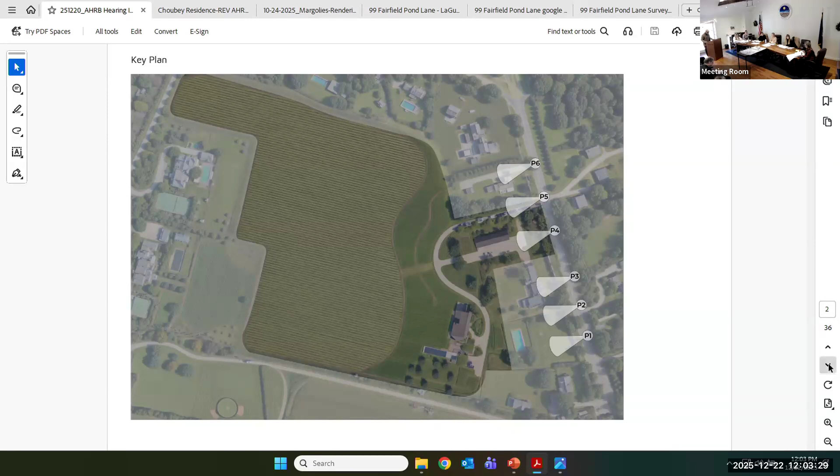Next slide, please. But before getting into the house we will be discussing today, I'd like to explain the broader context of what my clients, Michael and Heather Nardi, are trying to do here. As part of their larger vision, they have acquired 650 feet of frontage on Sagg Main, including the historic Sea Breeze Inn and the Roger Polimas house, located at 500 and 468 Sagg Main.

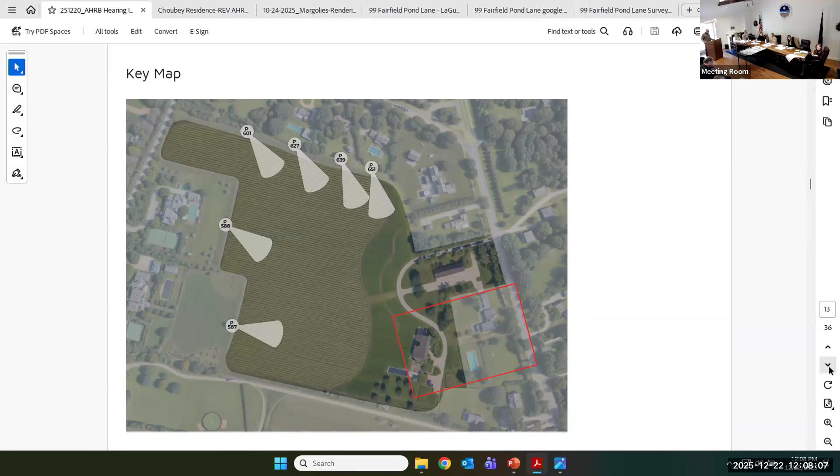Again, the same red rectangle situating Sagg Main at the base. The house you see in the foreground is the Sea Breeze Inn, and the house we're designing for Michael and Heather is at the back. Now we can focus on the house.

Over the intervening sessions between May and now, while accepting this premise, you, the board, have pushed us to pare down elements that do not contribute to this historic agrarian character. Looking back at our original proposal, your suggestions have certainly worked towards this end. We will be seeing views of the proposed house next.

If you go back to the previous slide, please. In our last session on November 24th, you challenged us to pare down the street-facing side further. The flat roof sections in front of the house were removed. While these flat roofs were an integral part of the original design, the shed roofs that replaced them, per Mr. Woods' suggestion, are a more faithful expression of this agrarian vernacular we are after.

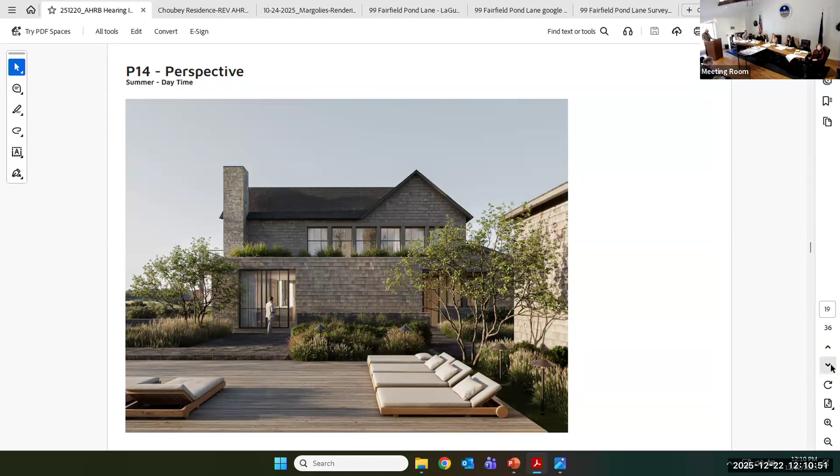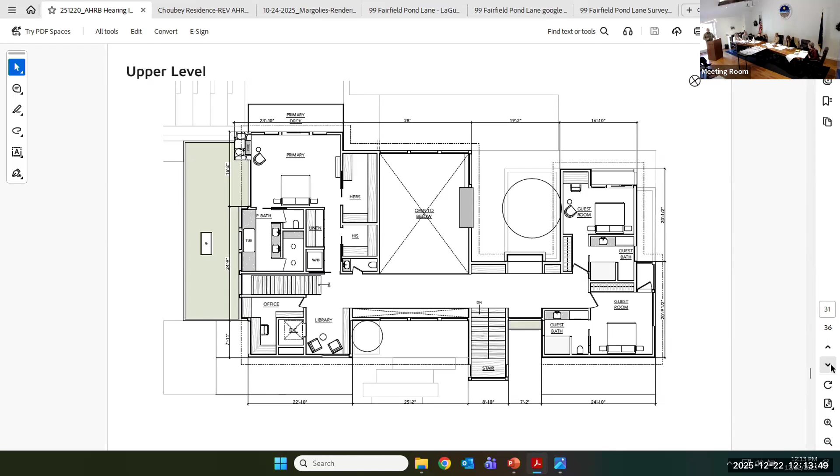In conclusion, we aim to contribute to Sagaponack's historical legacy with a home that belongs here, not by replication, but by resonance. This approach also aligns with who our clients are, folks who grew up here and want to savor its history while celebrating its agrarian roots. Thank you for your time and your patience.

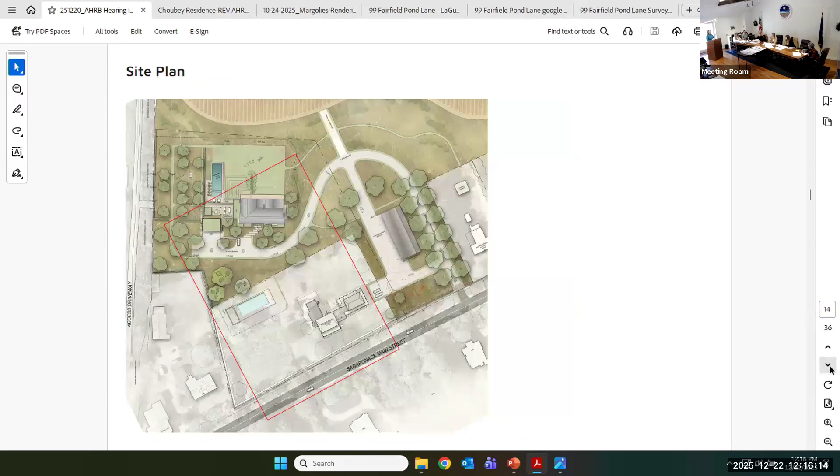Lisa Duryea Fair, would you like to come and speak? Hi, if you don't mind, before I get started, Abby, Pat, can you bring up the slide? It was 13 something or other. It showed the night view of one of the sides of the house. It went by fast, so I'm sorry I didn't write it down. That's it, that section, okay.

Hi everyone, thank you so much. I'm Lisa Duryea Fair, and I really appreciate speaking. I'm going to give you a brief amount of history of my life. I live at 167 Gibson Lane, a piece of property that my family has had someone in at since 1880. My experience with SAG board is 17 years working as village trustee on the architecture board, deputy mayor, as well as monitoring the architecture board and the zoning board during that time. Only our esteemed mayor over there could top me in years of service to our board. So anyway, that's where I come from.

On 11/24/25, the architecture board heard from the owner, Mr. Nardi, that the plan was to develop the property for the greater good of the community. Well, I feel as a community member I could point out some things that would help all of us from my experience, and hopefully bring this project to a better place.

My concern is not only the design, but the light and the glazing. My experience has shown me that there is no way a computer generated slide, like the one on the left, is going to accurately show you what the light looks like at night. I'll give you an example: if you stand on Gibson Lane or down on the beach, when people have their full lights up in modern houses with larger windows, you'll see that they don't look like what the computer generated model presented to our good board.

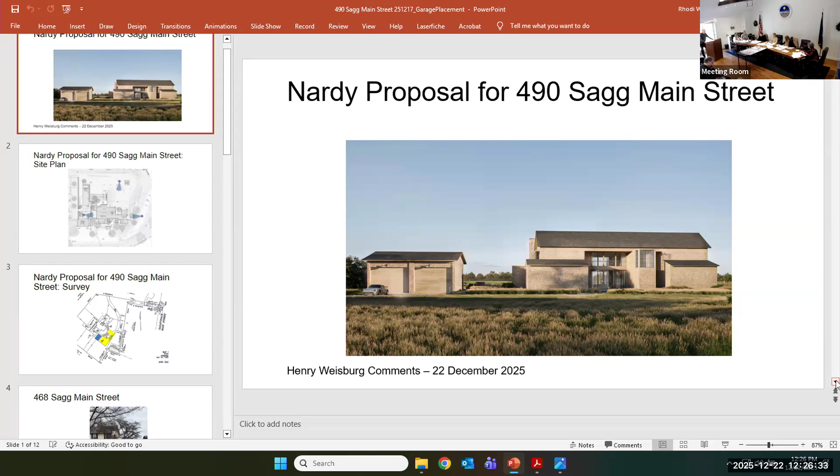If you go to the next slide, who's controlling the slides? Can you get rid of those little panels on the side? If you go to slide view, you can do it. See slide view on the top? Okay, then go to the left, down to the left, it goes slideshow. Maybe people will be able to see it. If you go to slideshow, click on that.

If you go to the next slide, this is somehow or other, for some reason I received this in the mail from Mr. Nardi's lawyer, and this is the actual survey of the property. What I've done, those colors are mine.

The blue is the garage, and the yellow is the parking lot. It's hard to measure precisely, but it looks like it will accommodate something like 10 to 12 cars in that open area. It is immense, virtually as wide as the entire structure. So what the street will see is the garage, and at street level you can't necessarily see the gravel, but you'll see cars parked there. So again we have an automotive presentation, and I'll get back to that because we've recently been through that exact problem.

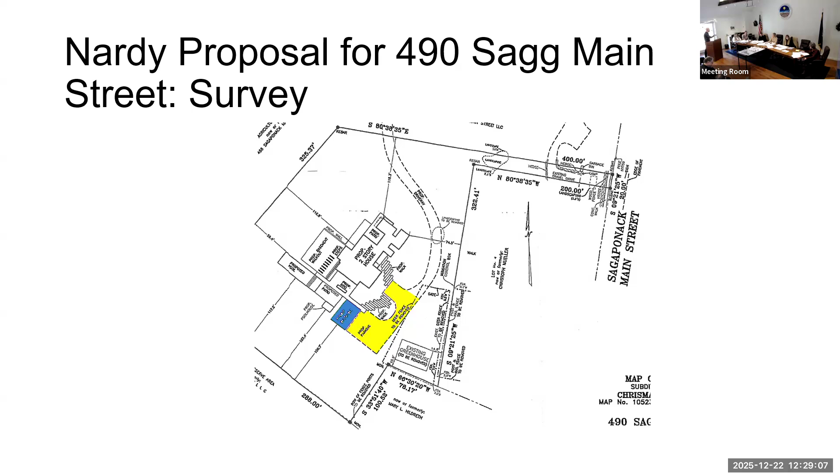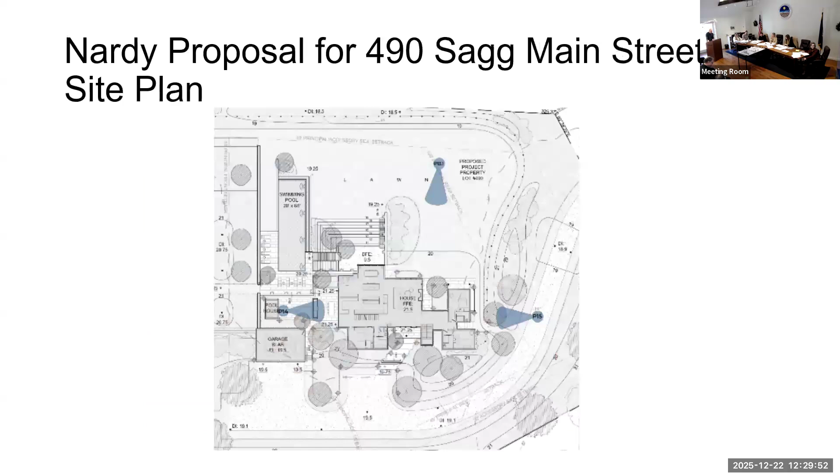And I don't think that's an appropriate structure. So now we've looked at the house. Now we should look at the surrounding community. What else is there? I've taken pictures of every house with a garage between Sagaponack Road and, is it Hedges? No, if you go back, please go back one.

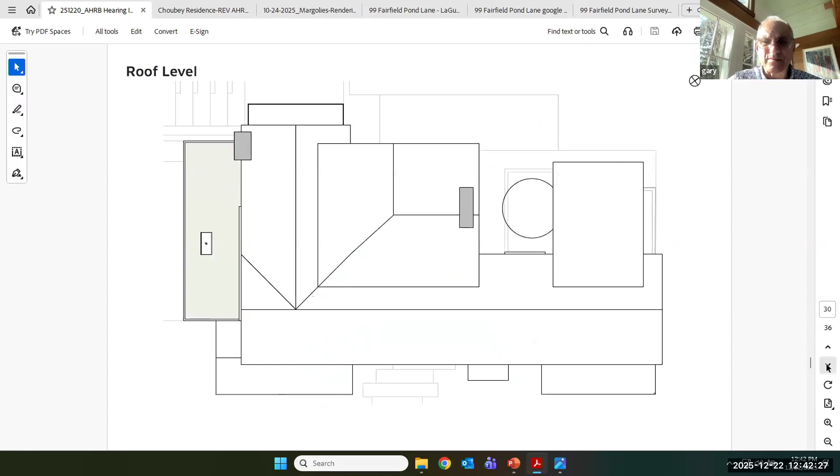This one, Gary? Yeah, it doesn't—this one unfortunately doesn't show all the neighboring properties. But I did look at this on Google Earth, and my concern isn't really so much with the house. I don't know how much light is going to come out of that at night. I'm assuming it's not—I wasn't at prior meetings, so I don't want to pass judgment. I'm assuming the light has been cut back significantly. My concern is really—

Using the ag reserve to bring headlights in, to bring light like that. I've lived in this house for over about 30 years, and it's always been peaceful, no light on the field—except I've had some problems with a big house directly opposite, to the west, where they shine their spotlight right into our bedroom windows. I've had to go over there sometimes because we just can't sleep. So I have the same concern here.

I don't know how many cars are going to be coming in and out at night, especially leaving the property. Does that driveway have to go like that, because it's using the farm? When I bought my property, I assumed it was an ag reserve and would not be used other than for farm vehicles. I'm concerned about the cars coming in and going out, how many there will be—which we'd have no control over—and being woken up at night with constant headlights. I'm not the only house that would be affected, because of the way this sweeps into the field. I see that the way the subdivision was created with the flag lot, provision was made for the driveway.

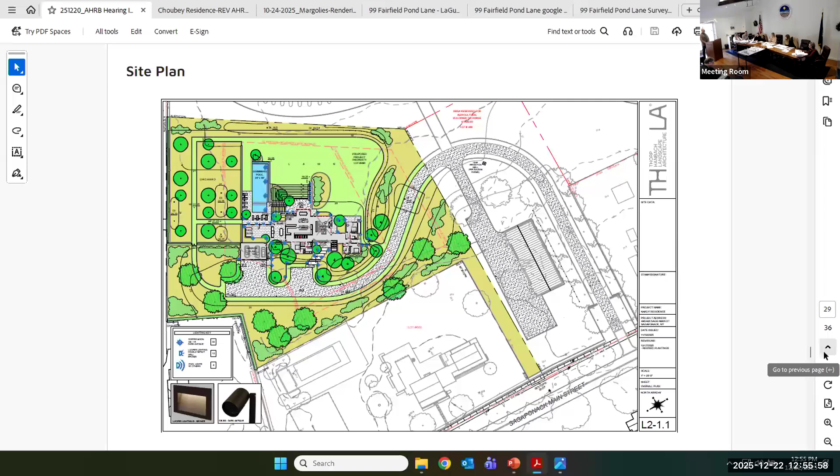Does that make sense? It does - I understand why you want it. What I'm saying is it's floor to ceiling windows, and it's wrapping around, so that whole section of the house is just glass. And I'm not talking about the pop out on the front of the house. The stair, you mean?

It doesn't look right to me. It looks odd, especially in a historic district. Behind this beautiful historic home, it's not meshing.

I'm also curious, what is the material of the chimney? That's stone. What type of stone? I believe it was fieldstone, Connecticut fieldstone, the same stone we had in the lower level of the building that we removed completely. So that stone remains, grayish Connecticut stone. I'd like to see samples of that when you come.

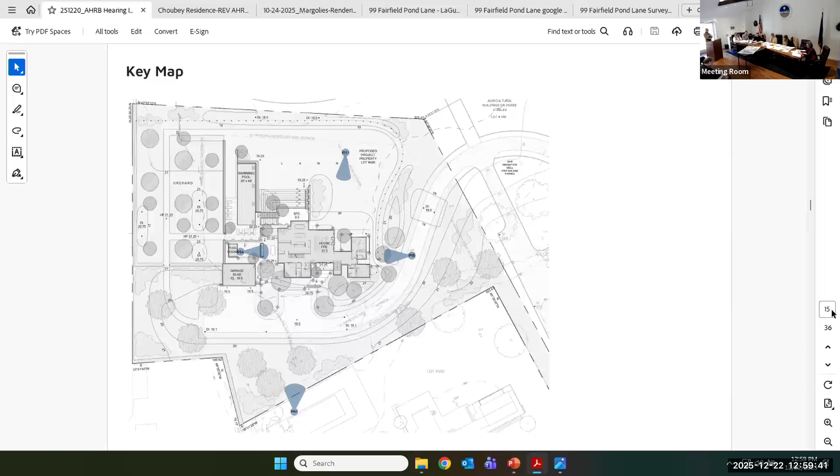So in this particular version, you have the vertical board at the bottom, but the trim I'm talking about is represented in this mock-up—it's the vertical, which is all the columns and trim work, and the horizontal. But where is that on the house? If you go to page 15, the north elevation, you can see it most clearly there.

Can you see the slightly grayish tone in this view? Unfortunately, the prints are a little harder to tell.

Sure, and where are you having the vertical? Shown here. That's a vertical. So there's no vertical other than those pieces. You're not doing vertical on the bottom—removed all the verticals. There's only shingle and trim.

You had mentioned, and Nardy had mentioned, that the garage is actually a three-car garage, but this shows a two-door garage. It should be 3 doors. We will put 3 doors, yes. And what is the garage material? Also shingle. And is that shingle, vertical, how? It'll be shingles all around, and then the actual garage door will be a horizontal board. I'd like to see how that looks as well.

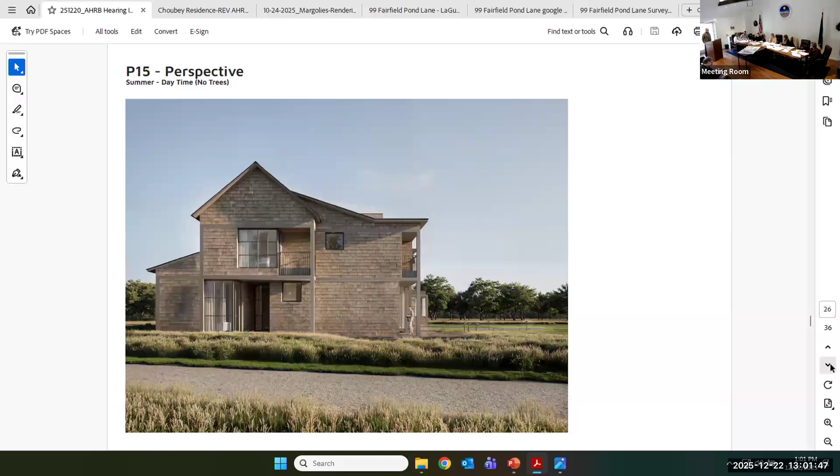I did want to ask you, on the back of the house, is this a garage door next to—could we look at the view, a couple of sheets prior to this one, P13.1? Is that a door next to the living room? Yes, that's the stairway that leads to the door into the courtyard.

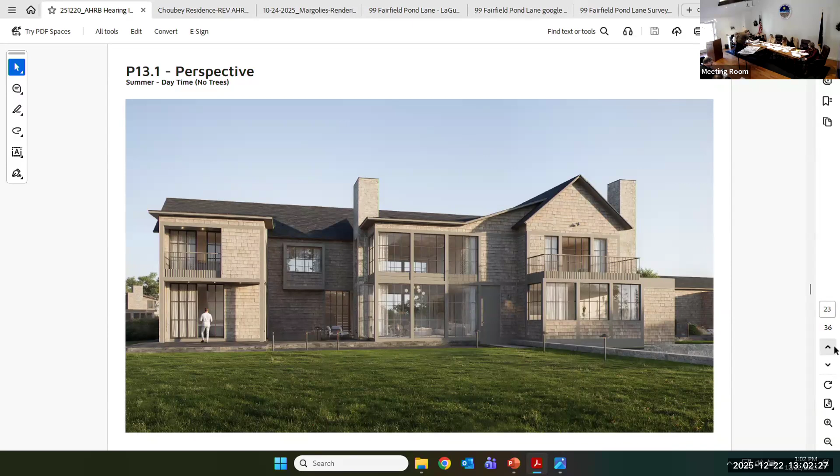And to the left of the living room in that alcove, is there a door that comes out from the living room, and then there's a window? There's a door, then the fireplace, and then it's blank. And this right here, is this a window or another door? This is a door—the stairs behind you come down, from the stairs you open the door to access the courtyard.

And this is another door? This is correct, another door from the living room to access the courtyard. And that's a door as well? Yes, no windows, just a flat black door.

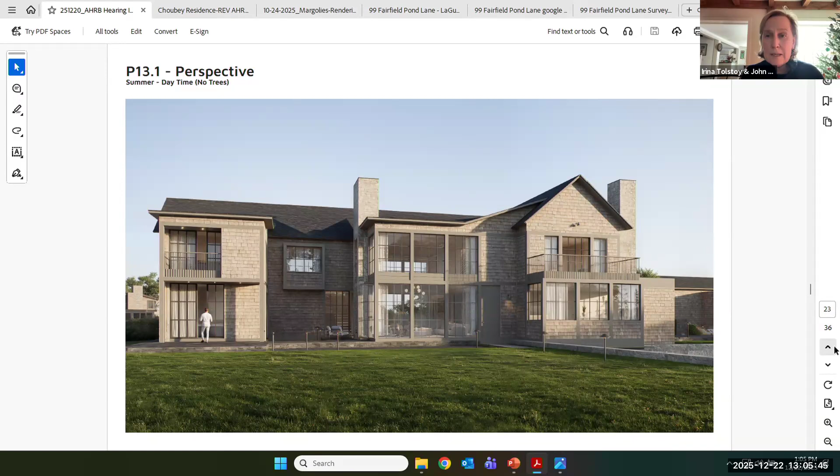I deeply respect the efforts that Mr. Nardi and his team have made to integrate the structure into the agrarian nature of the town, but I believe the amount of glazing on the house does not fulfill that mission. From the street side view, although the house borrows from agrarian vernacular, it remains a structure that does not fully blend into what I would consider the core of the village, where the original houses are notably small in stature. This may be reminiscent of a barn, but there's no hiding what it really is, which is a very large contemporary house. Perhaps there's some way to change the entrance so that it's a little less windowed.

And those lean-to sheds, I think someone else commented on it. I don't think they would ever exist in that location on a structure that has always been there. I'm concerned, it's very, very visible from the street. That's what I want to say. Thank you for the time.

I would actually agree that the visual mass and the width of the house is not compatible with what is in the corridor at all. I think the design is beautiful, it is absolutely beautiful, you are very talented. But I think the way this home is designed now does not fit in the area. It's not in kind of what's around it at all.

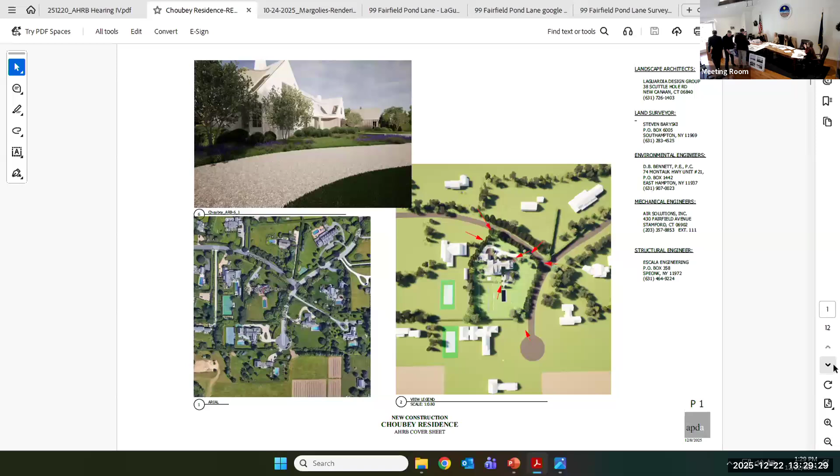And then we have hard copy, just in case. These are no different than the content you have, but they compare each elevation from the previous round of review against today's. Everything is filed with you already—this just puts one against the other. It's going to be emailed, but it's important, we're not giving you anything new, just for presentation purposes. We blew up what we have—it's just presentation material, the same content. We put north elevation against north elevation, south elevation against south elevation, against the ones from the previous hearing.

Okay, sorry, it just helps to see the changes. Yes, there's nothing new—we just want to help the board see what we've done. When I say nothing new, I mean nothing new from the last submission, so I can't bring anything different from the last one—this is just to be safe.

Can I just clarify something in the landscape really quickly? Is this privet hedge that's not there? This is an evergreen hedge that is here now. Okay, but it's not privet? No, it's evergreen. I believe it's a leyland cypress hedge, 8 to 10 feet. Yeah, it is—there's a picture of it. Okay, I just wanted to clarify.

All right, please continue. So, the proposal will be on top, the existing is on the bottom. One of the things we really wanted to focus on—I think three major categories, one being glazing. Luckily, in this particular set of plan iterations, a lot of the things we did to bridge the gap between the architectural vocabularies also helped us reduce the glazing. So if I can prioritize our execution, it was going after architectural synergy first, and then what resulted was a net loss of glass. That's a pure way of thinking about it.

Number two, a lot of the vertical battens that we all saw in the previous version were bordering a more contemporary fashion of creating a brise soleil on the glass. I believe one of the comments was about the simplicity of having just a window placed in a thoughtful location, rather than trying to hide it behind a veil. And I agree with that.

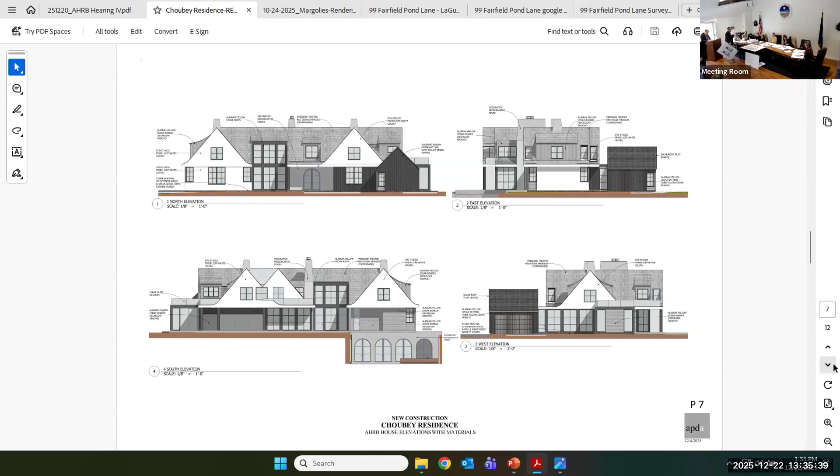Can we keep going? Can we go back a few slides, please? You're off. No, perfect. One more. Back. One more back. Right there, thank you.

Just one thing to note, if you look at the rear elevation, the glass you see in the orthographic elevation is set back about 35 feet from the front facade of this building. Over 20% of the glazing is set back 15, and in some cases 8 feet, from the actual eave of the house, meaning it's a screened porch area, the glass is set back. You can't quite appreciate that from a pure exterior elevation. It's a small point, but I wanted to make it.

What's been really heartening about this and the way the design team has responded is, typically what you'll see is people just make the windows smaller. That's not what happened here. It's a redesign that picks up the more traditional forms, and I think it's important. It's hard work, and it responds to both concerns, pushing the building towards a more traditional form as well as addressing the blade columns.

Yeah, no, I think they understand that. Yeah, but it's a lot of work. It's a lot of work. It's okay, it's not just making the windows smaller. I know, yeah, I know. And everything inside is affected.

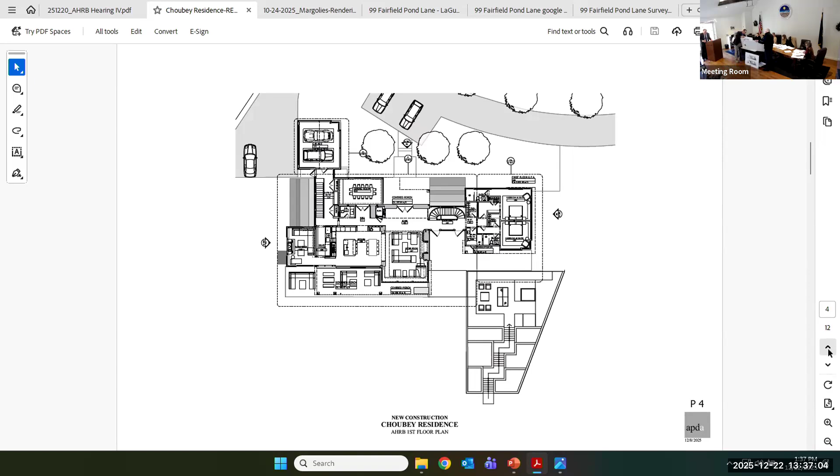So on this exterior elevation, you now see the columnation continuing down. That structure is about 50 feet behind the eave of the structure. However, the language continues through the living room procession, and I actually think that's a better architectural look in my opinion. Proportions of glass to the human experience looking outside your home at the wonderful gardens is important, but this overall helps bring it all together.

Is this middle portion here the same as this? No, that's not the other one. That's the living room right there, and that's sort of the kitchen area. So the middle section comes out, is that what you're saying? This section is out, and this is all glass? This right here is set back. This is the kitchen, it opens up the kitchen to the porch so that it's one space. These pocket against each other, set back 16 feet from that experience. It's the columnation, the ones with the columns that are forward in the elevation. Yes, so the area with the columns is the living room, just in the middle. These are set back 16 feet to open up the kitchen so it can spill into the screen porch area. It's just hard to tell with what we're looking at, elevations, perspectives, and this is a tiny picture.

We have a larger shot for you right here, the floor plan. Let me pull this up. Does that help you, Josh? It's the floor below, this is the back. I think the floor plan, the previous one, right there, you see the floor plan there? So that's this, the porch, you can just draw a red line right by that porch. And then, yep, that's set all the way back, between the kitchen and the screen porch, so that becomes one large kitchen.

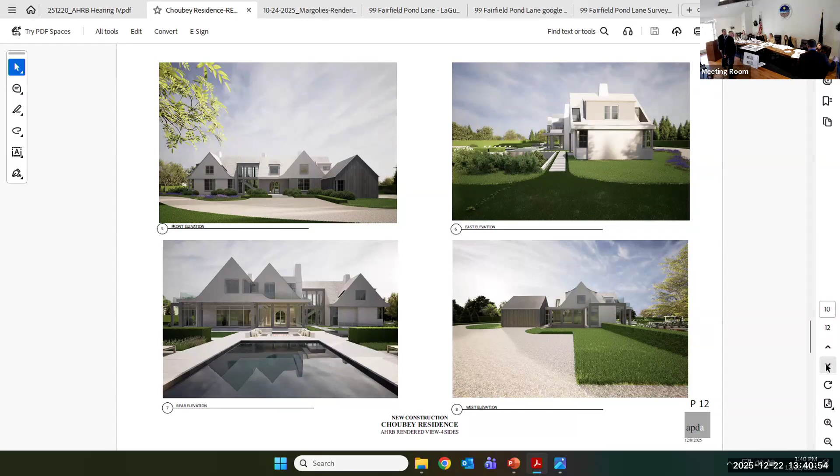Take another shot at it using the floor plans, renderings, and elevations. If you're looking at the west elevation on screen, you're seeing the garage in the foreground. But looking at elevation number 6, the east elevation, the garage is 80 feet away. Can you zoom in to the front of the house? You can see the front of the back, top left.

Yeah, that's a full 3D model of the house. The garage is set here, so when you're looking at an exterior elevation from this side, it's almost 70 feet away. It's hard to see, but this is a full 3D photorealistic model of the house as it would appear.

Garage, entry procession, the new site plan combination. Where's the site plan? I just thought that would be helpful. Oh, there was also one other thing we did. We also tapered some of the finished chimneys to create a more gentle approach, also trying to get away from some of the more modern elements you saw in the first presentation that we worked so hard to correct from the last presentation in November.

It would be nice to see the renderings with the color. I feel like a lot of it is faded, you can't really tell what it actually is. I can see the shape of the house, I get the idea, but to get the true feel of the different materials you're using and the true color of how it looks on the house.

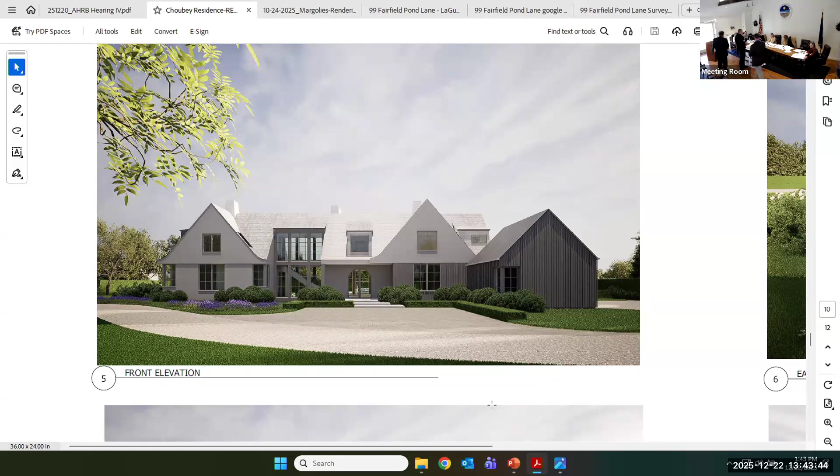So these views on P9, this is really the gist of what I'm trying to get - that angle of what the roof line looks like from the side. I can see this, and you can kind of see it over here, and I can see this right here. There's a lot of trees, it's being covered up. I just want to get the true feel of everything, and it's very flat, I'm not able to see it.

9 updated renderings - maybe if you took... We have pictures. P9 updated renderings, they're in the set. So if we can go to the next page, please. Up here they are. Go back, please.

Okay, so you can clearly see. Here's a perspective of the front elevation. And if we zoom in a little bit, you can see one of the architectural changes with the nice curves.

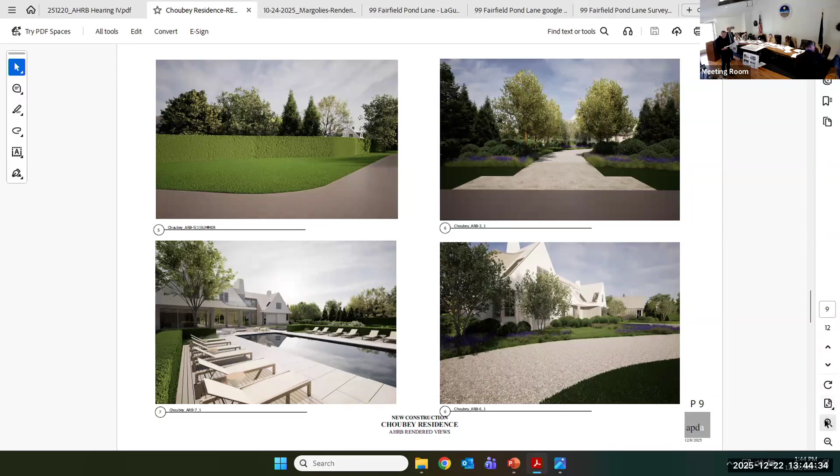Oh yep, here we go to the left, you'll be able to see that as well. Okay, so you can see now we've lost the vertical battens in this perspective. We now have the nice curved roof above the dining room and entry procession. The columnation you're getting a hint of here, the new window and door configurations of the guest suite without the vertical battens.

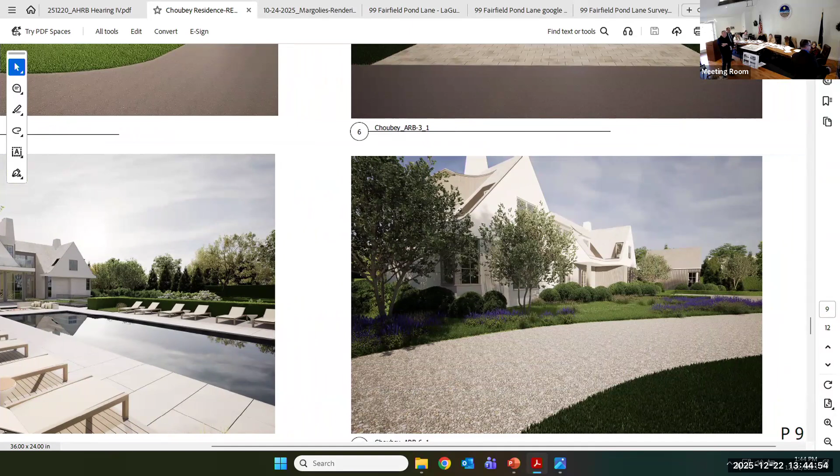If we slide the palette over to the left, please, if we move to this image. Okay, you're starting to see the columnation now in the living room. There is the stair hall assembly in the back with the columns.

Okay, we've again lost a lot of the vertical battens, so you don't see those cagey elements anymore on that elevation. Here are the kitchen windows behind the brise soleil. So that's all updated, as well as the more balanced chimney tops, which now have a little bit of a curve on them. It would be nice to see some of the images without the trees and maybe a full-size image instead of it being on a television, so that we don't have to zoom into it, so that we can just get a look at it.

Absolutely. I mean, are y'all having a hard time seeing this? It's just...

These new renderings are without the trees. I feel like they're taken from afar. I'm not seeing the true slope of the house. I understand what you're saying. What I'm trying to say is the renderings that we're used to seeing give us much more of an idea of the house.

Yes, I see the site plan. I know where it is. I want to have the feeling of the roof. I want to have a feeling of the slope. I want to have a feeling of where the placement is, and I'm not getting it from that.

It's just, at the last meeting, I know you've asked for exact front, side, pure views, and this is perspective, great, this is great. It's renderings, just a lot of lawn and a lot of pool. It's hard to get the whole house in the frame because it is long, east to west, and the only way to truly show it is to do it that way. Otherwise you're giving just a close up, trying to put it in with the sense of place there.

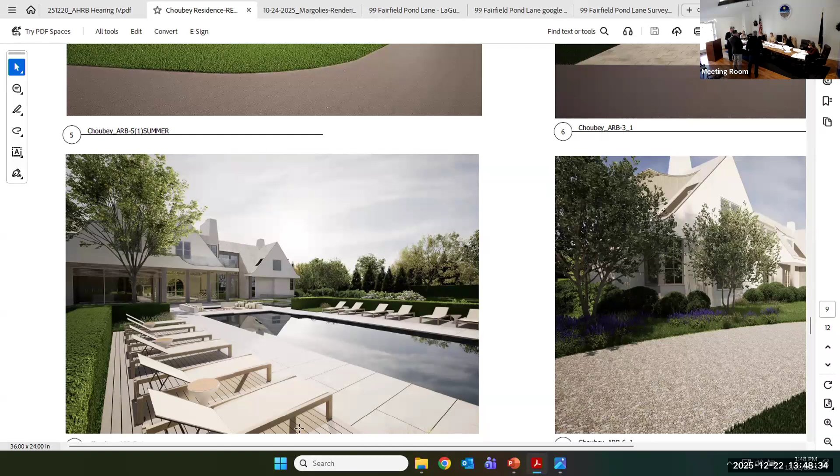Okay, so for example, on Blaze's house, one of the elevations was 53%. And again, I think you have to take this into account in terms of this not being a house that's on Sag Main or one of the historic streets. I don't find, and of course you look at all the other standards, anything excessively similar or jarringly dissimilar about this house in what is essentially a subdivision that was approved in the 80s and is populated by suburban homes.

Can you please pull up, is there a way to pull up 416 hedges, like a Google map?

What were you looking for? Because you're presenting 416 Hedges. Yes, I just want to look at that in real life and where that is on the map. It's between Daniels and Boston, I think. Yeah, sure, I know where it is. Is it on the street? No, it's not on the street. It's similar like this, yeah.

That matters, well it does. That's why one of the first things I presented was where this was in relation. It's just four lots back. This is on the corner, well, it's in relation to Sag Main, it's four lots back. That's what I was trying to say. Yeah, this is on the corner. Yep.

In the moments of being pulled up, obviously the main concern that was raised today was the effect of birds. Do you guys plan on using glazing on the glass as well? It's about a reduction of glass, right, for birds? Oh, there isn't. Are you putting a special glazing on all glass in all projects? Or just, that was an inquiry, if that was something you guys were planning on doing.

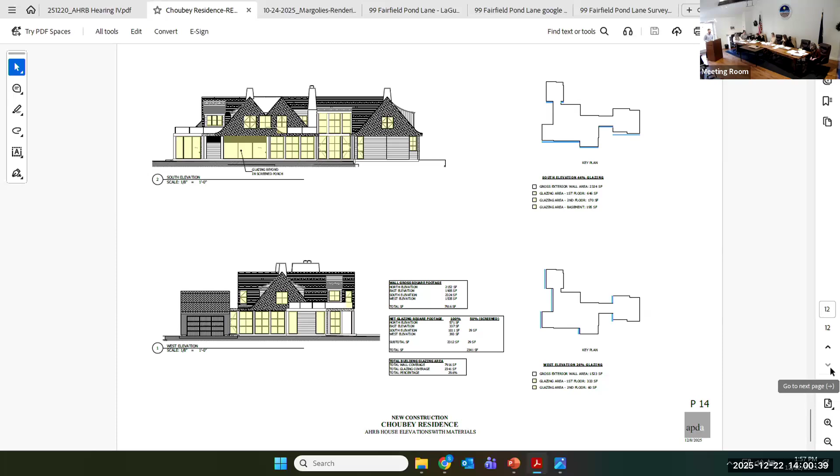As a brief history, we have ARB approval and a building permit for the main house. We had that back in September. We had a hearing for the main house renovation. We had to break apart the main house and the pergola and pool house as a result of requiring planning board approval, which we received last week at the planning board hearing. So this cabana, outdoor shower, and pergola are now part of that approved planning board site plan.

We are going back to a natural cedar shingle for both the roof and the siding. The windows, doors, and trim are going to be white. So this pergola, although it's not 100% consistent with the style of the home, is meant to pull back from the present location of the pool house and pergola closer to the home itself, and borrow just from the materiality, the cedar cabana, which is really just 9 by 10, and the outdoor shower, which is 6 by 8.

That's really going to be kind of framed within the Renson pergola. So when you couple it with the plantings, it's meant to kind of disappear. It's meant to be not as prominent. And the more prominent piece would be just the open pergola.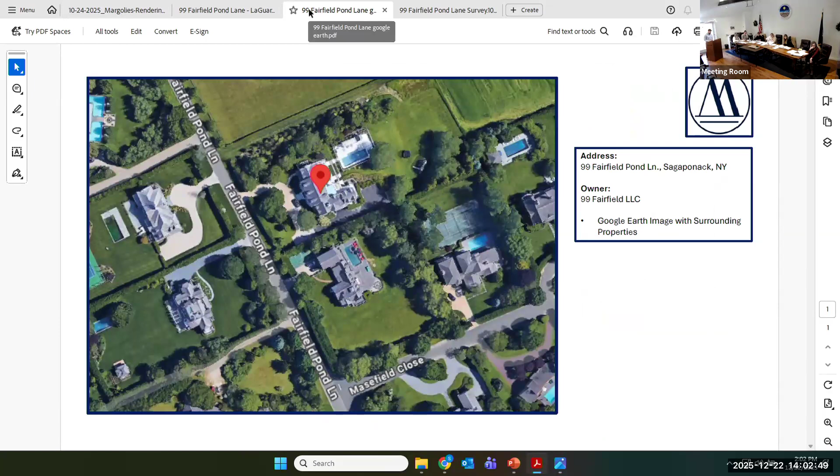Part of the exercise of bringing the patio back closer to the house is that it pulls the cabana and the pergola closer to the home, minimizing the exposure to the farm. We have, to the north, the conservation easement, which is wooded, and the opposite view of the cabana is facing the southern wing of the home too.

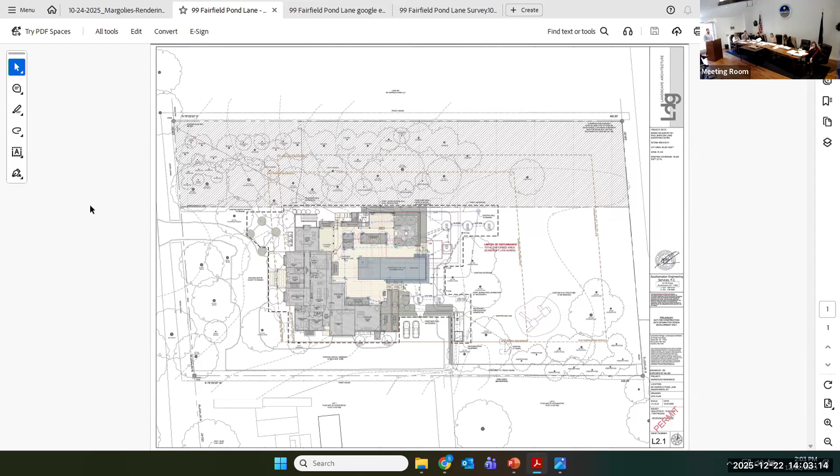So there's not really any exposure to the street or to the adjacent properties for the single door, which has a privacy film on it. So again, really trying to minimize the impact of the cabana and letting it really be more about just this open pergola. That was really the thought process behind this design. Thank you.

Anything sleek and nice. Works for me. Okay, thank you. That was easy.

Short of any lighting, I don't see any lighting plans here. You're correct. We may do a very limited amount of spot - not obviously any of the Renson offers all types of LED rope and firing up and all that. So this would just be a very few pointing down, spotlight directed at the patio itself. Matt can speak to ground lighting, path lighting, which would be obviously dark sky compliant.

And the back privacy screen is wood slats within their framed system, and that's really to pick up on the cedar of the home and cedar of the outdoor shower. So the client has no interest in any other panels on other sides of this - it's really just an open pergola. We obviously have what we need for the building permit in terms of coverage, since it's operable it has to be counted as coverage, so all of that math checks out as well.

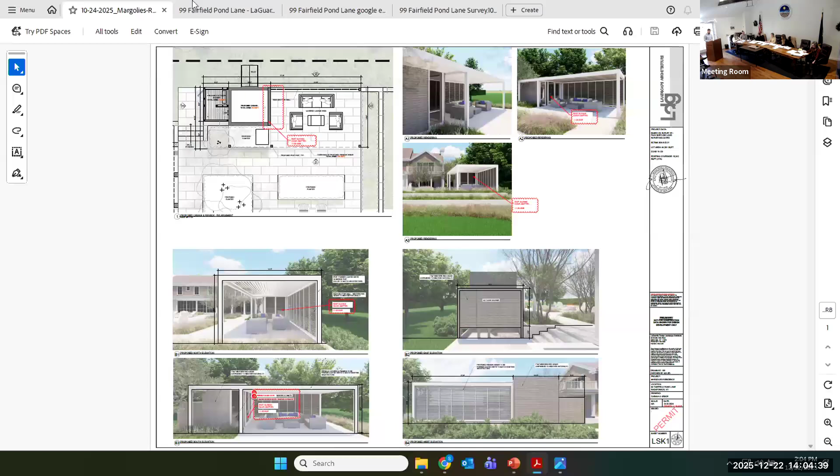Great, I'll make a motion to approve. Second. All in favor? Aye. Thank you, thank you.